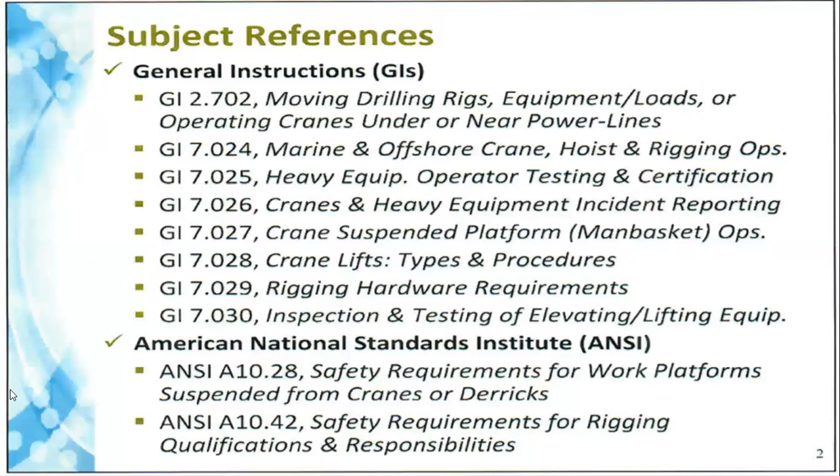Okay. Yeah. Now, crane operations generally require, like crane operators and riggers, operators shall be licensed and certified as per GI 7.025. Same requirements. Crane operators have final decision on lifts, and only Saudi Aramco certified riggers shall rig loads, even transport trucks and boom trucks as well. Cannot act as crane operator and rigger on same lift. Okay, the crane operator cannot be the rigger. Shall not leave controls at any time while load is attached. Load shall be floated 3 seconds prior to the actual lift. So these are, again, some rules, but these general requirements we can't violate actually.

Otherwise, if LPD or anybody notices, or anything happens, God forbid, the issue is Aramco will catch us the moment something happened, because then they will interrogate, and their incident investigation is so strong. They are a big team, Mr. Fawaz. They are a big team and highly professional, state of the art technical knowledge holders. They will not leave. They will ask. They will not leave the why until they dig out the real root cause of this particular accident. You know, and how are they gonna audit? They will audit all the safety rules, whether the rules were followed or not. That is the way they will investigate.

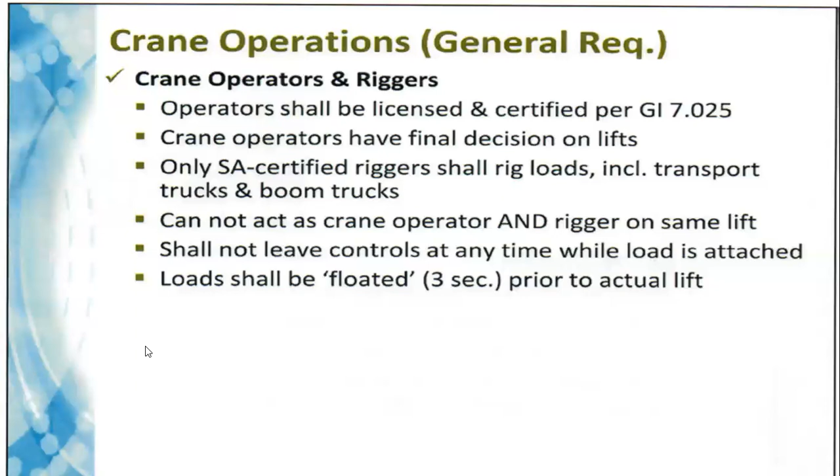Okay. But excellent, mashallah. You have some good energy to interrogate, to ask the supervisor why that leak was not managed, why the warehouse supervisor couldn't, because it was parked somewhere, why in the parking area the leak was there, and who was the daily safety inspector, why he didn't notice. If he didn't notice, why he was not focused, and why the report says okay, there is no issue in the warehouse, there is no leak at all in the forklift parking area.

So plenty of questions can be raised. And if you will not raise them, Aramco knows how to raise questions. So they'll dig out all the reasons, because they have highly expert people only for incident investigation. Sometimes it's a big team, by the way.

Crane equipment inspection sticker issued by a Saudi Aramco approved third party; crane lift performed at wind speed 32. Now, these are some important points. The wind speed means the velocity. So 32 is standardized for crane lift. And for scaffolding, if I remember exactly, 65 kilometers per hour, and for man lift, 25 kilometers per hour, unless otherwise specified by the crane manufacturer.

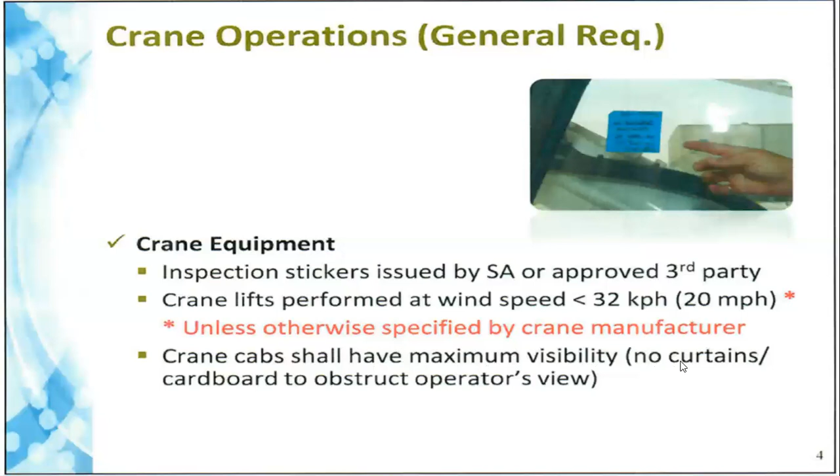Crane cab shall have maximum visibility, no curtains or cardboard to obstruct the operator's view. Crane operations general requirements. Crane equipment, look at the outriggers. Sometime I can share a few videos via WhatsApp, and anytime you have time just see how sometimes we are balancing the outriggers.

Like if the left side outrigger is lifting up, sometimes I notice people sitting on that side, putting pressure so it doesn't lift up. This is a bad practice I notice, especially as an auditor, but you can have a look at the pictures. Outriggers shall be fully extended, wheels off the ground. Outrigger mats shall not be permanently secured to pads. Persons shall not ride the hook, headache ball or load.

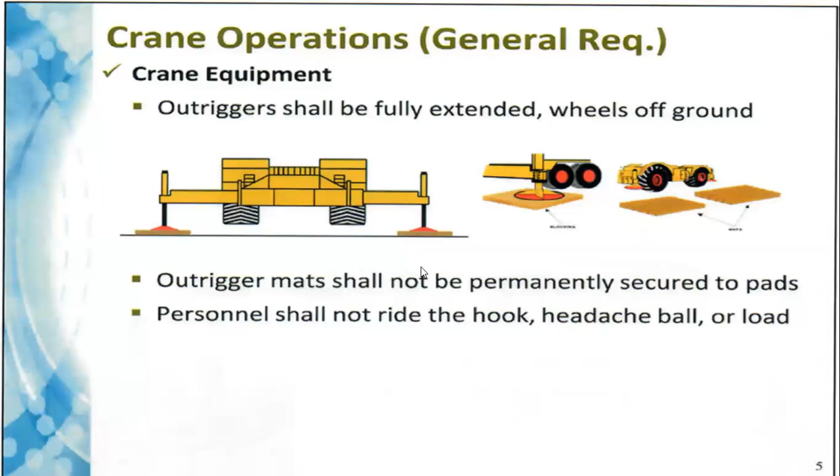Again, the crane operator and the rigger must be competent enough, and you as a safety leader make sure they are following these rules. If they're not following, just raise the NCR or guide them, or have a toolbox meeting, or maybe a separate refresher training session for safe crane operation or safe rigging and lifting operations. You can create some training topics according to your TNA.

Okay. So crane operations: maintain proper distance from energized power lines. Below 50,000 volts, make sure a minimum of 3 meters or 10 feet is maintained from energized power lines.

And if it is 50 to 250,000 volts, 6.1 meters, 20 feet, and then 250,000 and above, 7.6 meters, 25 feet, the distance, because this electric energy has magnetic effects, it actually sucks in, even sometimes the area is energized, because it's high voltage, and any short circuit. That is why it's very important to be away from the energy, especially the overhead power lines, and even underground power lines need a lot of care. Taglines shall be used unless they cause a greater hazard.

Please take a screenshot, or I'll share this presentation also, okay? Lifts must be plumb, and a designated signalman shall be used at all times.

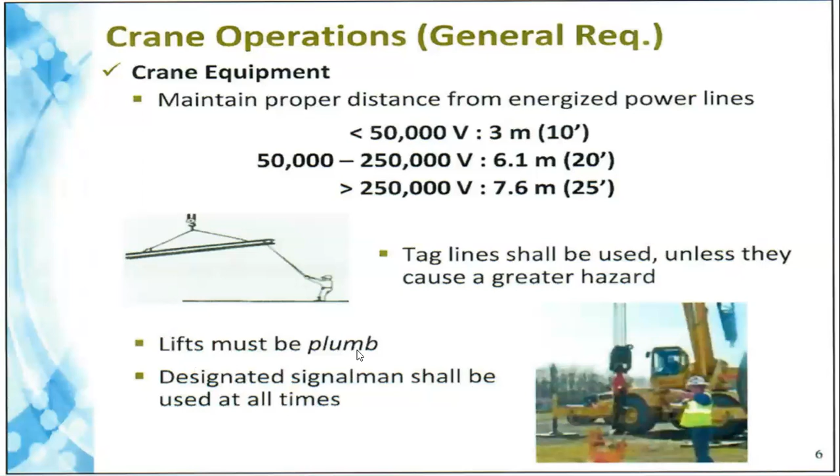Now, onshore crane operations: hydraulic cranes with additional boom sections shall not travel more than 1 kilometer or 0.6 miles inside plant facilities. Crane movement inside plant facilities requires a locking device on the boom, a crane escort, and a flagman also. Cranes shall not be used to drag loads along the ground. Provide minimum tail swing clearance of 0.6 meter or 2 feet.

Okay, so these are some of the requirements, but these requirements must be in the mind of the crane operator, the riggers and the flagman, whoever is involved. But you as a leader, just audit them, just inspect them, whether they are following this or whether they are aware or not. If they're not aware, arrange a training for them.

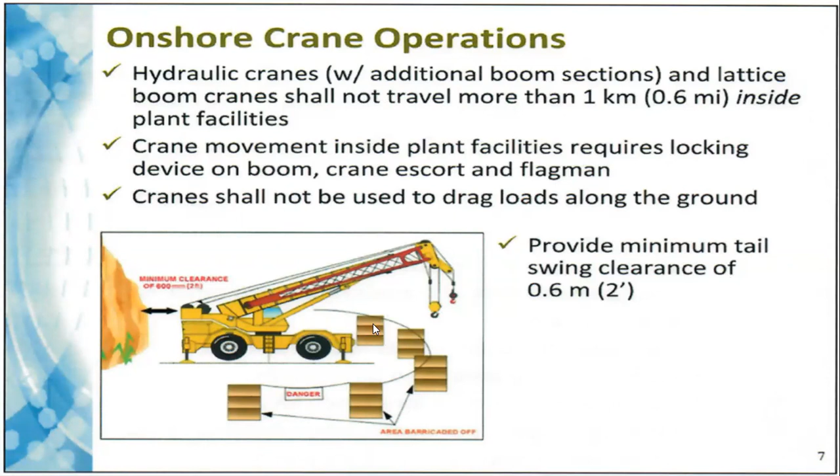Now, this is the important part, critical crane lifts, because for any load we are lifting, we need a rigger level. Below 10 tons, we need rigger level 3, 10 to 40 tons, we need rigger level 2, and 40 or above, we need rigger level 1. So 1, 2, 3, there are 3 rigger levels, but the most important thing is there are certain conditions where the load might be very small, but still we need a rigger, still we need a critical lift plan. What are the requirements?

Critical lift plan per GI 7.024 or 7.028 shall be on site prior to any critical lift. Rigger 1 in charge of coordinating the lift. Critical lifts within 10 meters or 33 feet of hydrocarbon or pressurized piping, populated areas, or railway lines. Loads above 40 tons. Load exceeds 85% of the crane's rated load capacity. Occurs at night. Explosion, fire or high heat hazard. If these conditions are there, we need a critical lift plan.

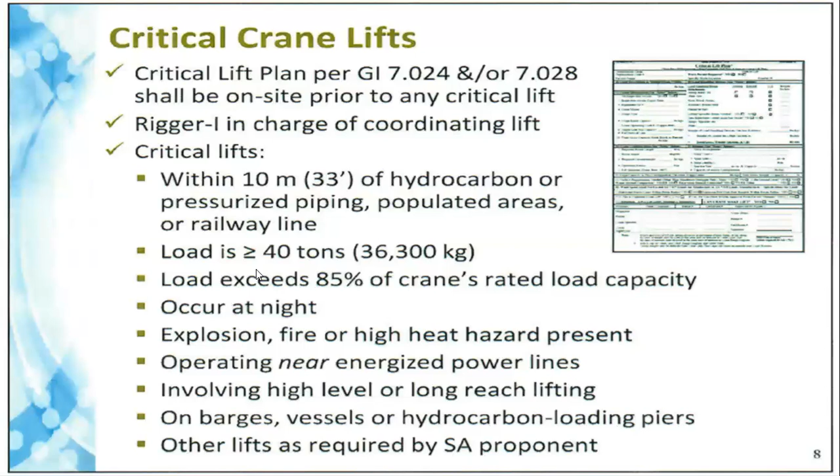And that critical lift plan, Mr. Fawaz, only rigger level 1 is authorized to prepare and even approve. Okay. So operating near energized power lines, involving high level or long reach lifting on barges, vessels, or hydrocarbon loading piers, and other lifts as required by the Saudi Aramco proponent. So these are some requirements related to critical crane lifts.

And now the rigger level one must be familiar with all these formulas. He must be knowledgeable as a rigger level one. For rigger level one, we have a separate 5-day training, Mr. Fawaz. In these 5 days, we teach all the technical formulas, all the safety requirements, as well as the practicality. And this is how you can pass the rigger level one exam, theoretical as well as practical, within Saudi Arabia. But you have to be serious enough. It's not a small study.

Again, continual focused study. So, man basket lifts: baskets shall be inspected and certified, crane suspended personnel platform permit SA 9648 issued, derate crane by 50%. If man basket lifts are there, wind speed below 25 kilometers or 15 miles per hour, dedicated rigging hardware specified per section 7.8J. Trial lift required with equivalent weight and positioning.

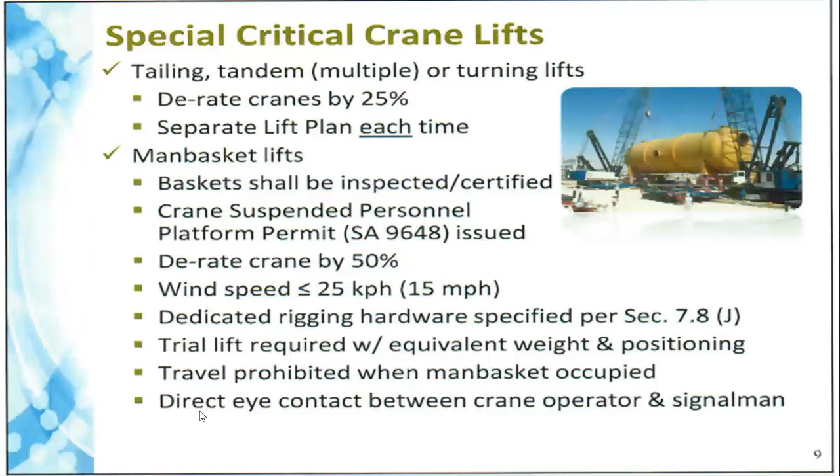Travel prohibited when the man basket is occupied. If it is already occupied, don't travel. Sometimes we travel: okay, you are in the man basket, so let's move. It's horrible because you are disturbing the complete balance. Now, direct eye contact between crane operator and signalman. So that was all about cranes and lifts.

And the humble request is